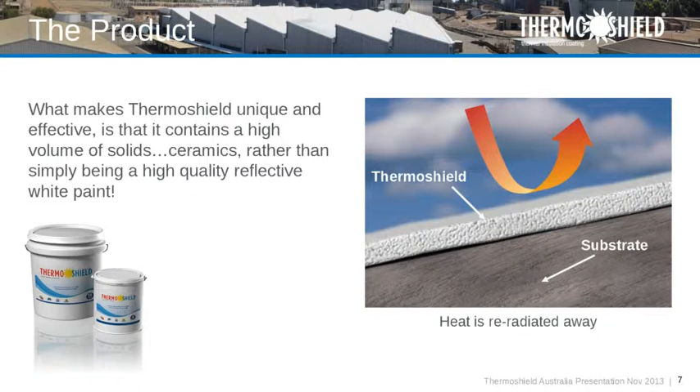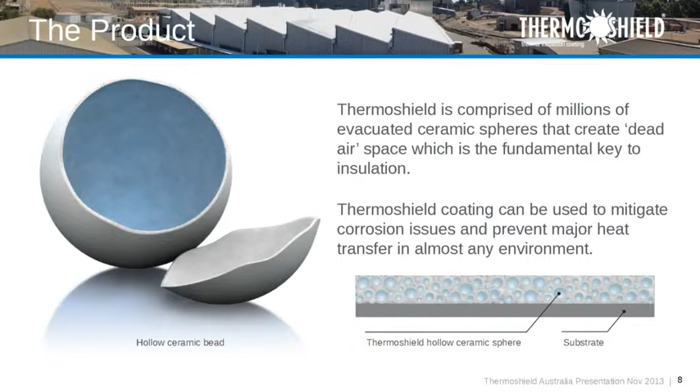I have some samples up here you can touch and feel later if you like. But that's an example of the spheres, and there's millions of spheres in this coating. And the special mixture is what you have to get right. And you have to put 2 coats on so that all the spheres cinch together. And it's actually fascinating because with this as the raw material, we get it at our factory, you put your hand through it, it's like a liquid. I mean, it's a very interesting physical process.

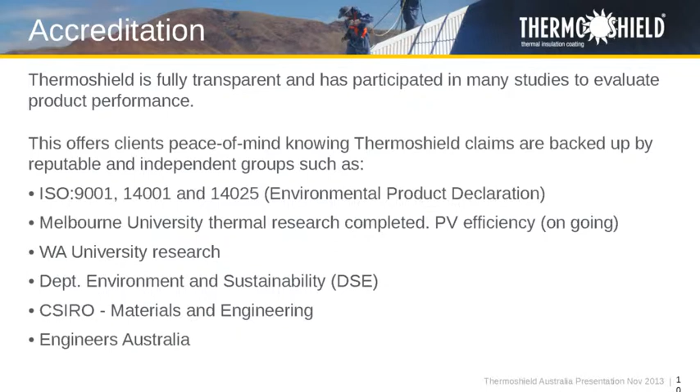It's changing on my screen. Oh, maybe I had a memory lapse. Just give it a moment.

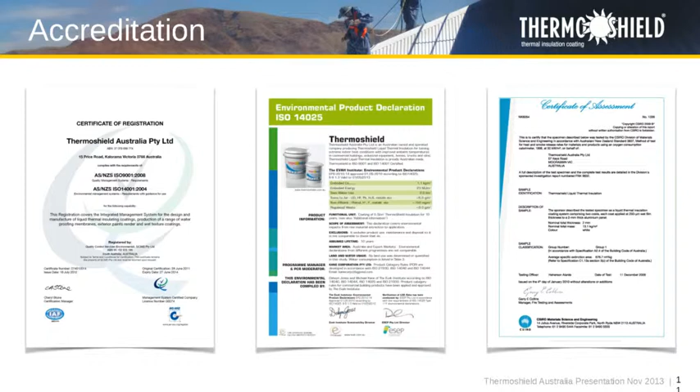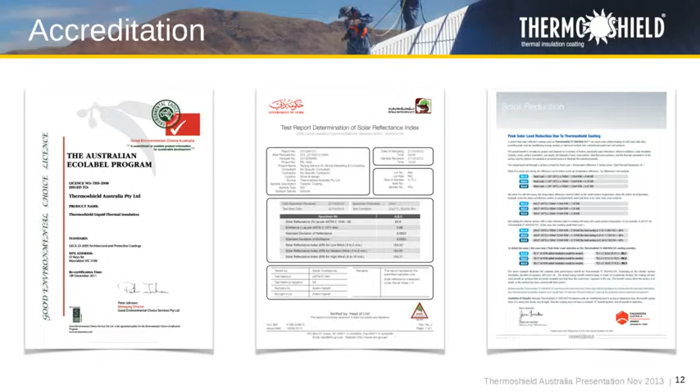Yeah, there are accreditations: ISO, EPD, CSIRO. We got GECA way back in the day when that was one of the only environmental certifications we could get, so we had that. We export to Malaysia, India, and Dubai, so we have our Dubai work. And this is what Engineers Australia came up with as far as our issues around emissivity, reflectivity, insulation values, all that. So if you want any of this in more detail, just let me know.

This is the latest excerpt from when I was at the Living Building Challenge launch with Dominique Hes last week at Abbotsford Collingwood. This was the result of the PV efficiency study, the thermal study. The red bit's the critical bit. As most people know, PV likes light, but as some people don't know, PV doesn't like heat. After 25 degrees Celsius, PV efficiency starts going down.

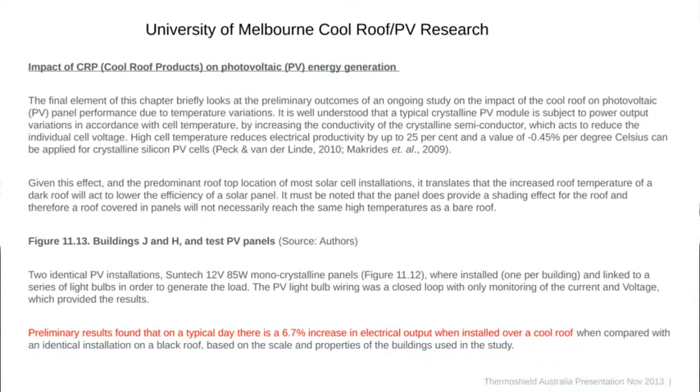So what you want to do is keep the substrate and the area around it cool. Also, because we usually come in a white color, even though we're not only white, we reflect more radiant energy around as well. So what you really want to do is keep your roof cool, your substrate organized, so you avoid thermal shock. Then you put PV on it, and that whole system, looking at the beast holistically, is a great way to deal with the thermal load on an asset—a building, a house, a chook shed, a refrigerated transport—and generate the maximum amount of PV energy you can.

The U.S. Coast Guard hasn't installed PV anywhere without a cool roof under it for 10 years. So they look at it as a whole system. It's not a decision, it's just the way they do it.

We have a number of proposals in to fix up some of their assets so that they can bolt the PV life expectancy of 30 years onto them, and hopefully the roofs will have that same life expectancy. But we're just looking into the concept that putting PV on old roofs is a little bit dysfunctional, because when you're going to have to repair the roof, what do you do?

So we try to be the good guys, as opposed to—as I was saying before—LEDs are really easy to measure. They're 83% more efficient than other downlights or whatever. You can measure that really easily.

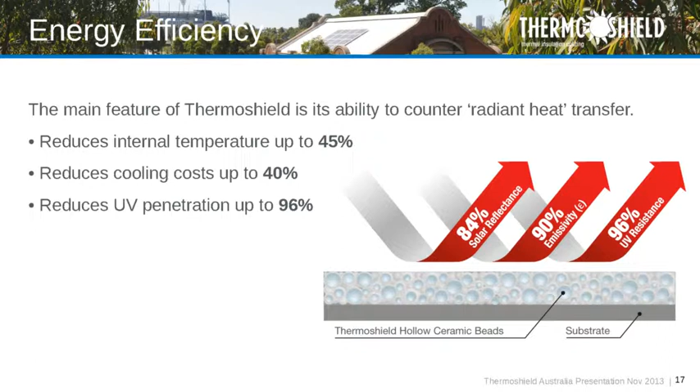Obviously, we're a little bit weather dependent, and that's just a fact. So we say these are the results that we get, but just like with your car mileage, your mileage may vary—it depends. We get a 3-year payback in Victoria oftentimes, and more like 2 years in Townsville, for instance. So anyway, we got the best results there.

This is just kind of a rundown of what you're trying to accomplish if you think about it holistically. I've been trying to deal with the Air Conditioning Association about re-specifying how buildings and the cooling is calculated by putting our stuff on an asset. So maybe you don't need a 40-ton condenser, you need a 25-ton condenser with our stuff. Or regardless, you're going to run it less, so the maintenance will be less.

We actually have a site up in Harcourt, a winery, that we coated. The gentleman got a grant to build a shed, but he couldn't afford the $100,000 to run 3-phase power to it. So he said, Charles, I can't pay to cool it, so I need you to coat all of it. We coated it 6 years ago now, and he's never needed air conditioning. We just stabilized it, and he stores his wine in it. Just crazy.

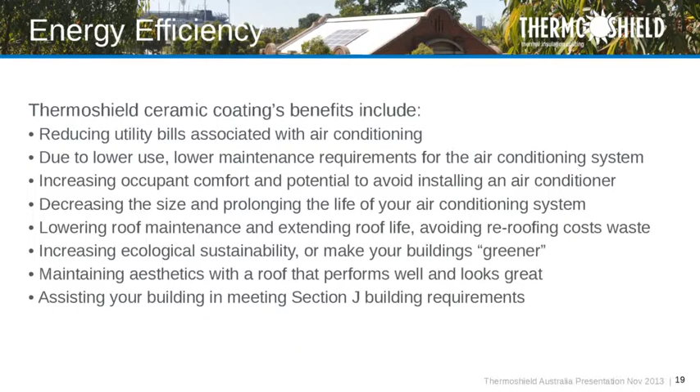Extending roof life, yep. We meet Section J requirements, and we think it looks good, and you'll see why. And this was the linchpin. It took a couple of years of research with the university, but reflectance is a lovely concept because there is a little bit of heat and visible light, and that's all good. But if you're working on only that principle, once the asset gets dirty, which everything does, you have no more tools in the toolbox. So what they found is that we have high insulation properties. So that's what gives us kind of the advantage around the place.

We do a lot of work for the Queensland Caravan Association members, and we get these lovely emails from the Grey Nomads in Alice Springs saying, Charles, my van's totally red, but if your stuff still works, we're sleeping cool at night, it's all good. So we get great results. And these are their findings in the report. And again, I have the whole report. If you're interested, I can email it to you.

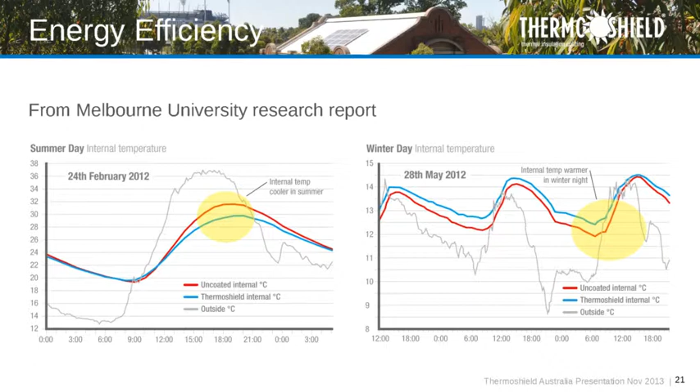But obviously cooler in the daytime, but warmer at night. So obviously in Victoria, we heat and cool. It's not Townsville. So some naysayers around the place say, oh yeah, cool roofs are all great, but they negate the benefits in the winter. Again, as I'll always honestly say to you, it's a tool in the toolbox. So depending what you use it for and where you use it, you just have to be aware of what you're trying to accomplish. But that was the proof that it's an insulator, and that's what, again, makes it more interesting.

Some of the data I'll show you, I hope I can get all my graphs and things happening. The other thing, for instance, I just did a presentation to Parsons Brinckerhoff. I deal with a lot of mechanical engineers because we do change the way buildings operate. A lot of air intakes off buildings are on the roof, so you're oftentimes taking in 80-degree air and then throwing energy at it to cool it. And then, ironically, you put it in a steel box with minimal insulation, transport it across the roof to shove it down the side of the building, and then you heat it up again. So the system doesn't seem to be that sensible if you think about it.

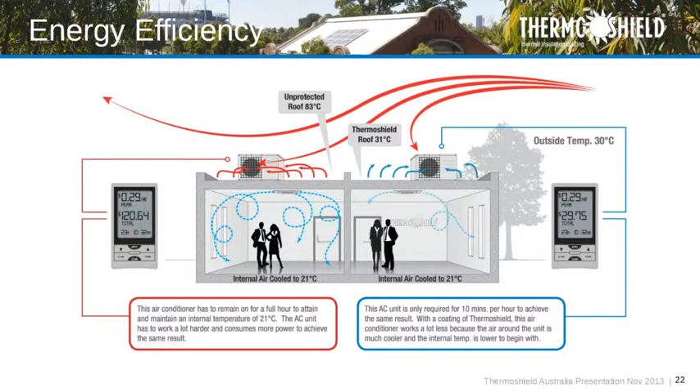So the results we get, which I'll show you, is we bring roof temperatures down, oftentimes 40, 50 degrees. So the air intakes, you have to throw less energy at it, less running time of the condensers, and obviously less thermal intrusion from the outside. So we kind of deal with it in a holistic, as I say, like a trifecta approach. And these are some of the roof temperature differences we get. And this is again from the University of Melbourne report.

We did the Croydon Leisure Centre some time ago, and that's the savings they got. We love leisure centers. They're great for public relations because everybody loves their leisure center, but they have two problems. They're energy pigs, and they have chlorine, moist, hot chlorine. So the Ashburton pool we just did last year, it was going to be a $20 million refurbishment project, redevelopment, and they were going to take the roof off.

We went in, we did the outside of the building for thermal reasons, and then we did the inside of the building for corrosion. The purlins, the supports, the inside, everything, and the whole redevelopment went to $14.5 million. And now they get the warranty, they get everything. But they didn't have to tear the whole building apart, and the downtime was reduced, and happiness all around the town. So leisure centers are, if you think about ammonium nitrate sheds, that's really toxic. Moist chlorine is the worst, it gets into everything.

We won a $45,000 government voucher from the Victorian government, and we're doing some regional work. And they wanted something rural, so I actually had a guy up there today in Bendigo. We're doing a chicken shed comparison. So the preliminary results, we're getting the energy data and all of that sort of thing. But just as a quick aside to show you how sometimes I get measured around things, and as I say, it's a tool in the toolbox. For chickens, I get measured less around energy and more about mortality. So less dead chickens, we win.

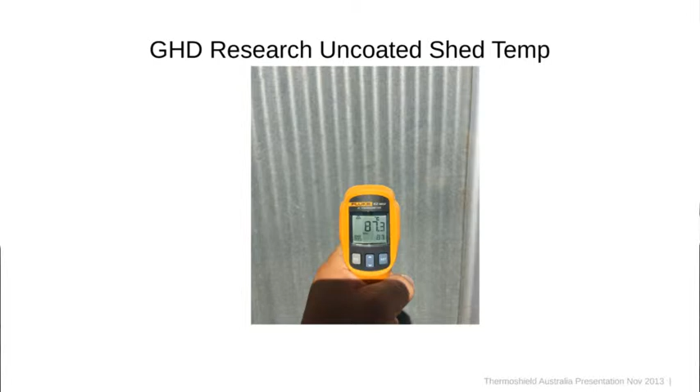At piggeries, I get rewarded for more pigs. Because when the pigs are more comfortable, the pigs make more pigs. So we are getting energy data, but with agriculture, it's always interesting because the asset owners have different motivations around things. So that's the chicken shed. We wanted to get an identical environment, if you will, so no shading and nothing to get involved in the study. When we started, that was the temperature of the shed exterior. And after we coated it, and we recently reformulated our emulsion, we got higher quality ceramics. That's the results we got. So if that heat is not building up on that substrate, it's not transferring in.

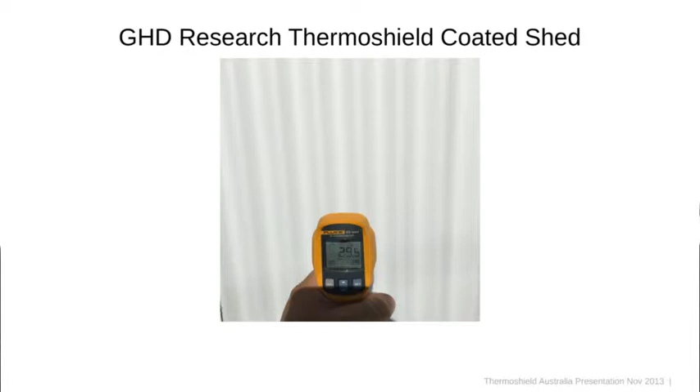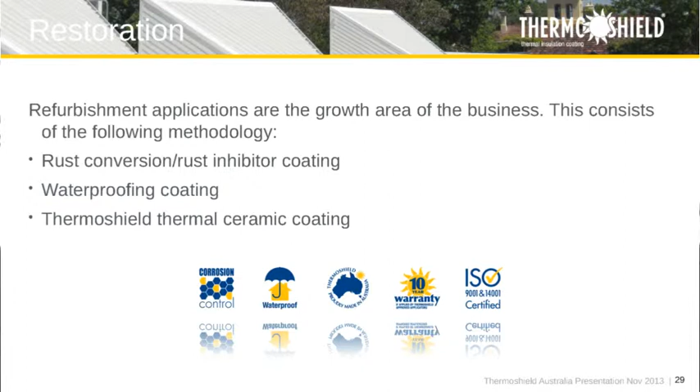And the beautiful thing is we have a 10-year warranty. But because we're an acrylic or a water-based solution as opposed to a polyurethane or a 2-pack, etc., in 10 years we can renew the warranty just by cleaning it and putting another coat on. We don't have to strip it back to the bare metal and start all over again. As I said, I have some samples up here you can touch. It builds up really well, so you just get more performance out of it.

So obviously, I'm trying to work with hospitals and schools. I actually have a meeting with the Alfred pretty soon, because unfortunately I had to spend some time there. I had my gallbladder out, and all their roofs are rusting tragically. You can imagine a hospital having to rip their roofs off to replace them. So I'm trying to work with them. I finally got in front of the head of capital and infrastructure to do our system with it: deal with the corrosion, the waterproofing, the thermal, and then hopefully with their building management system measure the whole experience.

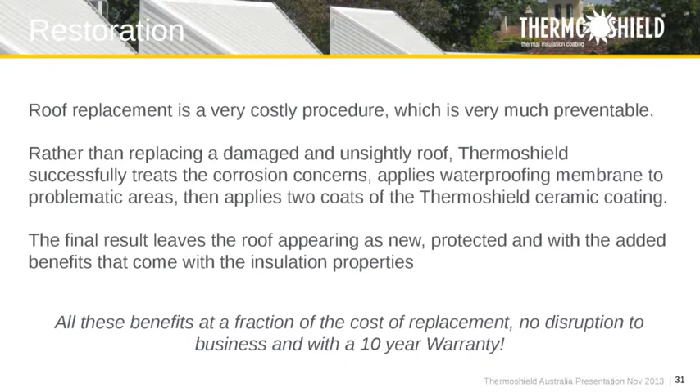Again, this is a roof plumber kind of dynamic and a building dynamic, but thermal shock is a serious issue. My wife bought us a puppy some time ago, and I thought the dog had some kind of seizure disorder, because every morning she'd be in the back extension where we have this big clip-lock extension, looking up and jittering and flipping out, and I'd say, "What's wrong with the stupid dog? What the hell's going on?" She could hear the roof moving before anybody else could. As the sun came up in the east, she would hear the expansion and contraction. I would hear it at 11 o'clock, and she'd hear it at 9 o'clock. I'm like, damn, she's smarter than I am. But that's how you get leaks.

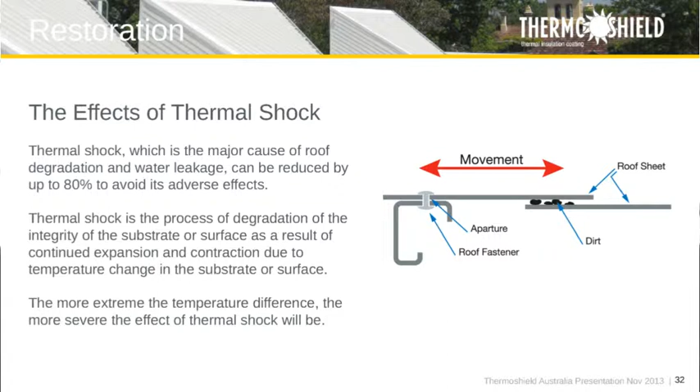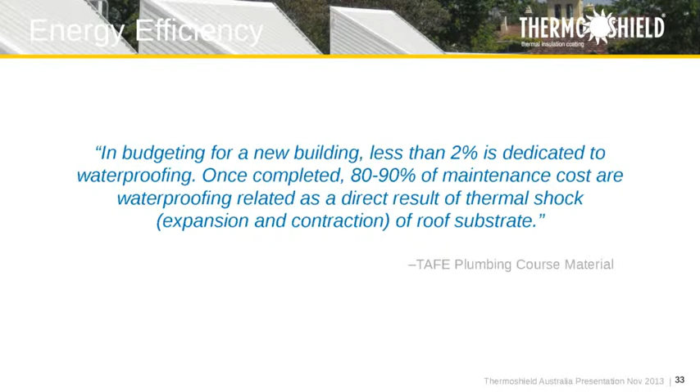The minute you put a roof on, it starts disassembling itself just by nature, especially in Victoria when you get your 5-degree mornings and your 30-degree afternoons. It's just physics. And because I've had to hire all these plumbers to do all the work prior to my Thermoshield extravaganza, this is just a fact. It's in the plumbing manual. So it's a little bit distressing, really. I guess that's good for us, but this is why I'm trying to deal with John Thwaites at the Australian Building Codes Board and the National Construction Code to put this kind of technology in as a tool in the toolbox: building envelope, dealing with assets, future-proofing, all that sort of stuff. Because it's just a shame that we let the outside in.

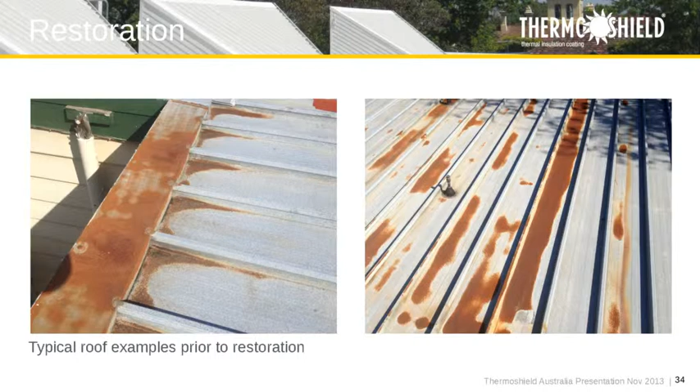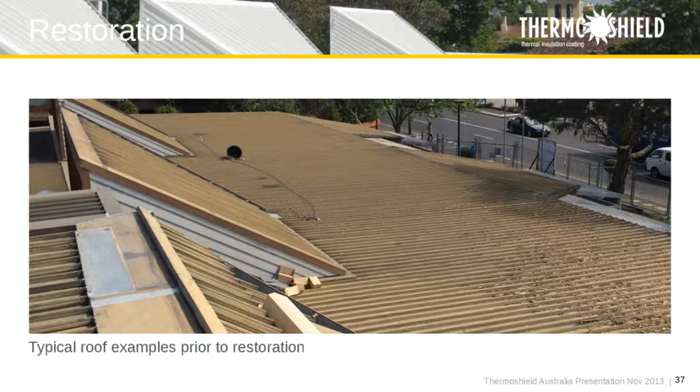Again, this is just stuff we couldn't put our Thermoshield on over naturally, so I'm actually in the process of buying a company in WA that has a compatible rust converter that actually works, unlike some Bunnings products, and is compatible with our system. So we see all this kind of stuff. That was the Ashburton Library before we got at it. Major energy consumer on High Street. They actually bent the roof over that top purlin, so all of that was cracked and leaking. And the red there is our rust converter. So it's also an Achilles heel kind of telltale. If our Thermoshield coating fails, you'll literally see red.

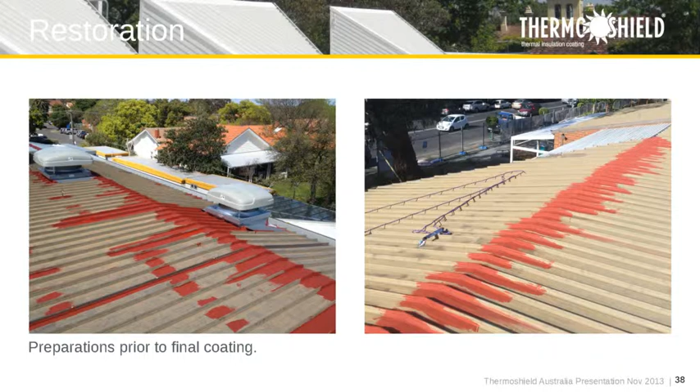So we own a drone. Everyone should have a drone. It's really useful in our business because we can do drone inspections and pre-project reports and analysis without actually getting up on stuff. So we repair everything and do it properly. Again, all that was just cracked and it was tragic.

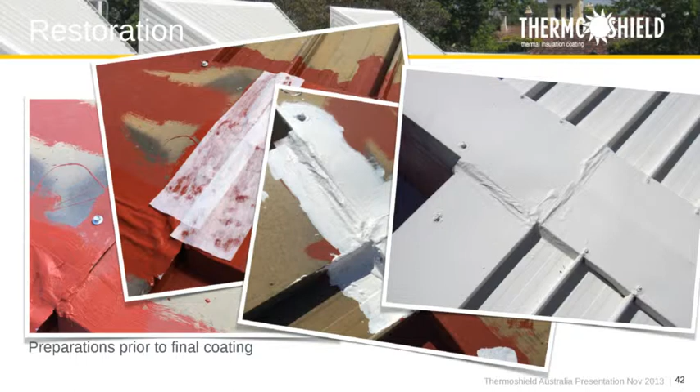And we come across these roof plumbers with dissimilar metals. Again, another sciencey thing around how corrosion starts. You need air, oxygen, and water, and then if you have dissimilar metals, it just accelerates. So we see this kind of nonsense all the time. So we put in fiberglass patching, so we really cinch up the asset, and it just takes care of business.

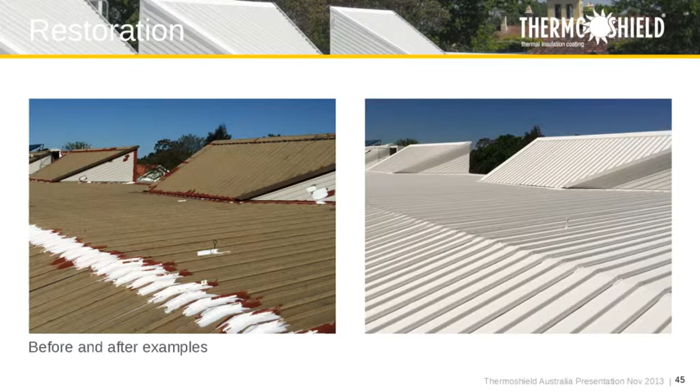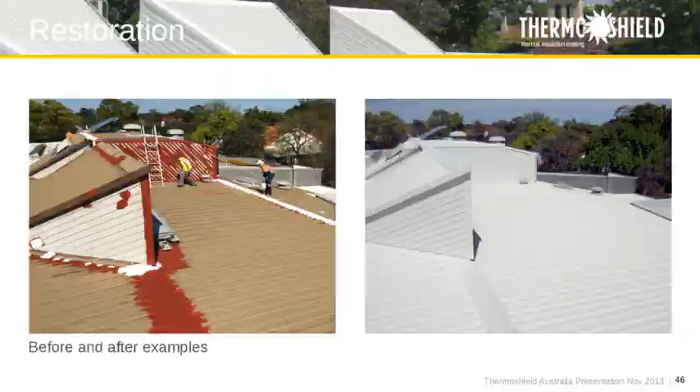And that's the before and after. We think it actually looks good. So many people are saying, oh goodness, they're going to have a white roof in Ashburton, oh gee whiz. Never heard anything about it. But the Dandenongs, ironically, have an adverse white roof policy for some reason. Now, bear with me. I won't go too much further into that because corrosion, I know you guys probably want to talk more about energy stuff.

And Rick, the engineer there, approached us and said, we need a solution. So he is a really good guy, and I love engaged clients because I want to be able to measure hopefully 12 months prior to our application, and then 12 months post, so we can see in different latitudes and longitudes and different kinds of buildings, because again, it's all different, what kind of results we can contribute to energy efficiency. So he has given us login privileges to his building management system. So we can capture data at any time.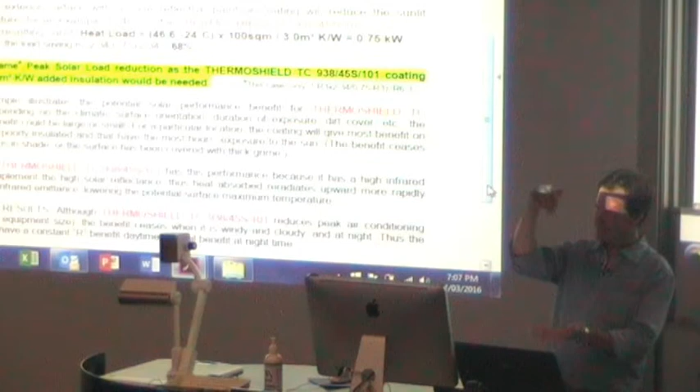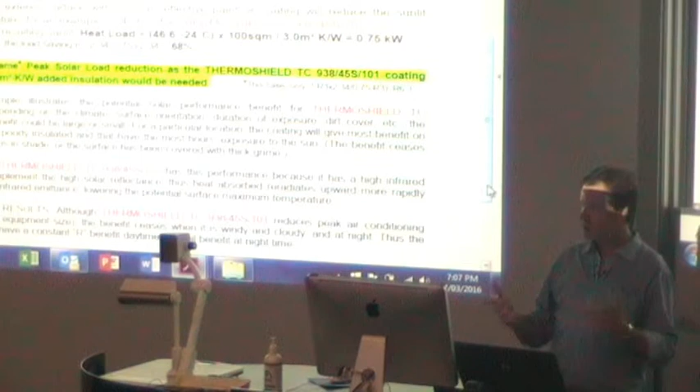the better it performs. But again, it's not working on the principle of R value like resistance. It's not letting the heat in the building first and then fighting it. It's fighting it from the outside. So we're fans of people that have insulation already in their structures, because we're just going to make it perform better. We're not trying to put the air conditioning guys out of business. As this report shows, extreme heat is going to be a thing. So air conditioning is still going to be required, but we're just saying, let's use it less and more efficiently.

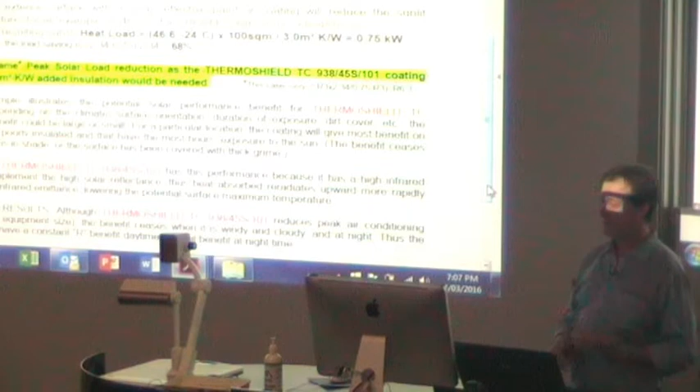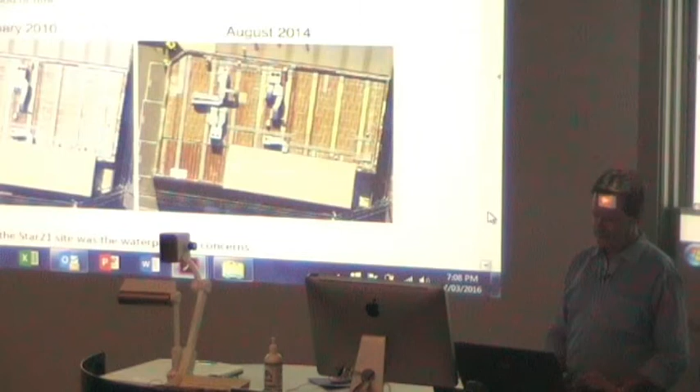This last one is a local example, so I want to show you this one. This is in Abbotsford, our Telstra dealer across from the Carlton United Brewery. We use Nearmap a lot, as you can imagine.

Nearmap is kind of like Google Earth but much more current, and you can time-lapse it. So as you see, building managers let things rust, and once you see the rust starting, it's amazing how it accelerates. When we started this project, all 4 of those condensers were going, and when we finished, only 1 was going. This client is also engaged and going to monitor his energy for us.

Plus they're going to have to replace that roof. Look at all the assets and the plant they'd have to disassemble to get at that roof to replace it. It would just be shocking, expensive, disruptive and tragic.

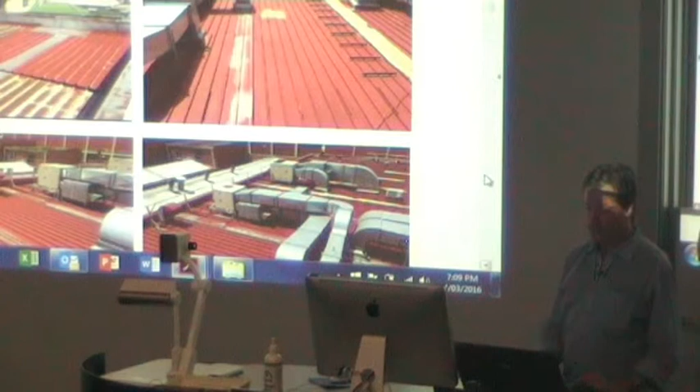Unfortunately for them, on this job our rust converter is actually an expensive thing because it really does work, and it's acrylic. So the most expensive part of this job was the refurbishment.

The red is, as I said, the rust converter. So again, if the Thermoshield ever failed and we did a drone inspection, if there was red coming through, we'd be able to see it. We do all the duct work too.

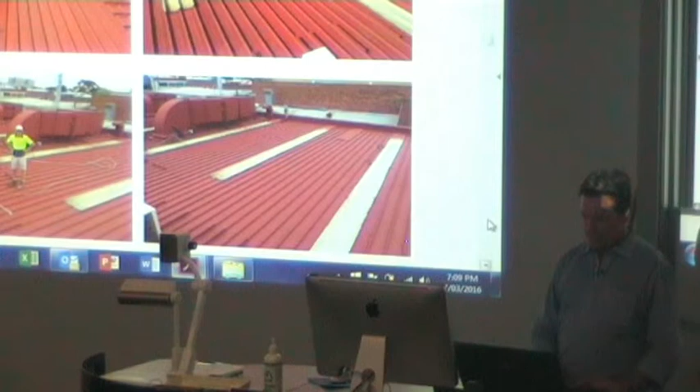The first coat, then condensers, second coat—this is the whole project in a nutshell, right across from the Carlton Brewery, right on Church Street. So that's before, that's the rust converter, and that's after.

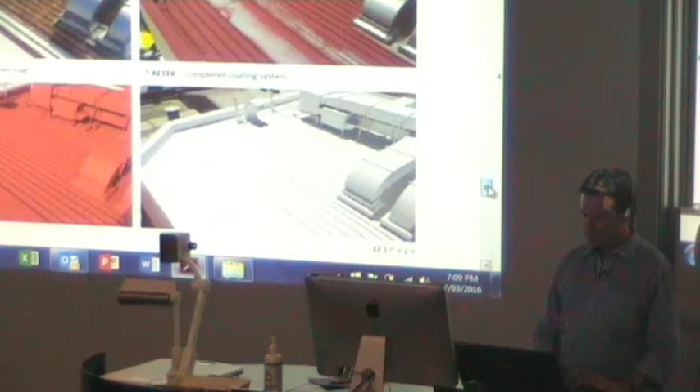It's just a really great system, so now you don't have to throw the roof out either. That's why we're adding that into our sustainability story. We're definitely all around energy efficiency, but we've taken it to the next logical level around expansion and contraction reduction, photovoltaic enhancement, and reducing the thermal load on the asset, whatever it is.

One thing I was going to try to show you—has anyone gone to that My Climate website, the thermal web from CSIRO? It's something the city launched. We're trying to wrap this in, because you can really see it.

This is an interesting tool they've developed where you can actually see the urban heat island effect. This is where that whole study came into play, where we were looking at roof potential, because there are multiple ways to deal with the roof—you can deal with it from a PV generation perspective, or from an infrared and ultraviolet rejection perspective.

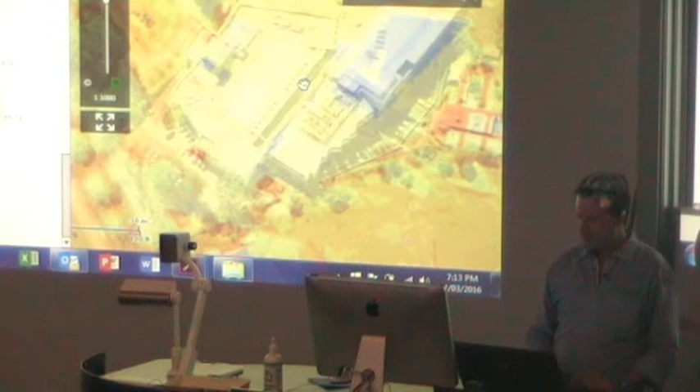This area here, we did all that about 6 years ago, and ironically it was done by an applicator who we fired, so we're redoing that for them at no charge. But then we're doing all of this and all around, hopefully before the season turns this year.

This is an interesting tool in the toolbox because you can see your neighborhood, you can see all sorts of things. But it's a validator. It's again, as I say, we're all about the data and the transparency. So this is another tool that we use to show people.

I was with an architect at the Pixel building a couple of weeks ago. He got onto this thing in his boardroom on the big screen, and he was playing with it, and he thought it was terrific. He was zooming in and finding this really, really hot spot. I didn't do it - he was zooming in, and it turned out what he was zooming in on was an oval.

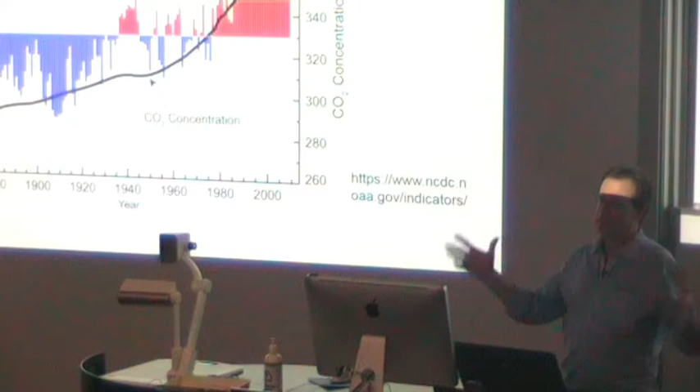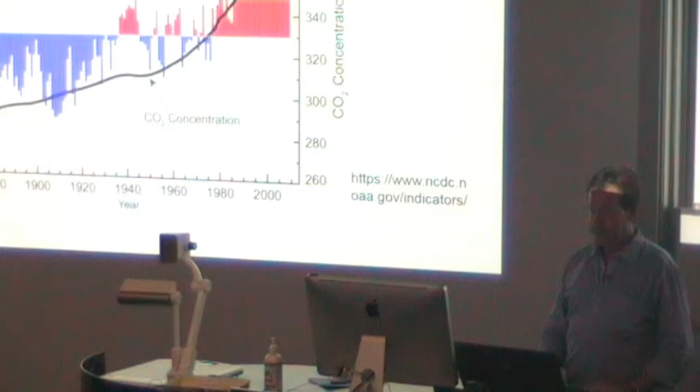They were very nice to email them to me today, just because I thought it was relevant, because I'm a big picture guy. I mean, yes, I love to do buildings and all that, but it's all about all of us, and schools and hospitals, and if this is the kind of stuff that's happening, we need a lot of tools in the toolbox, and I think we're just one of them.

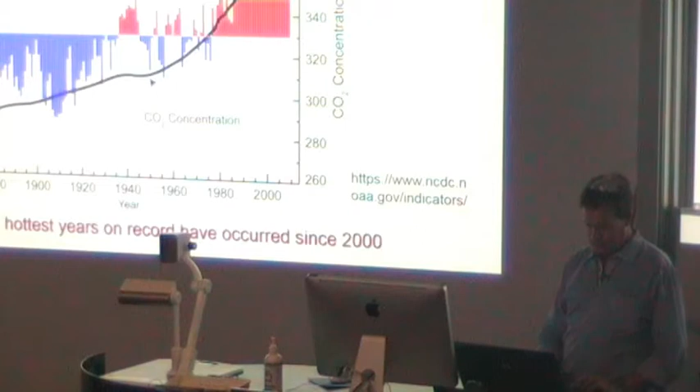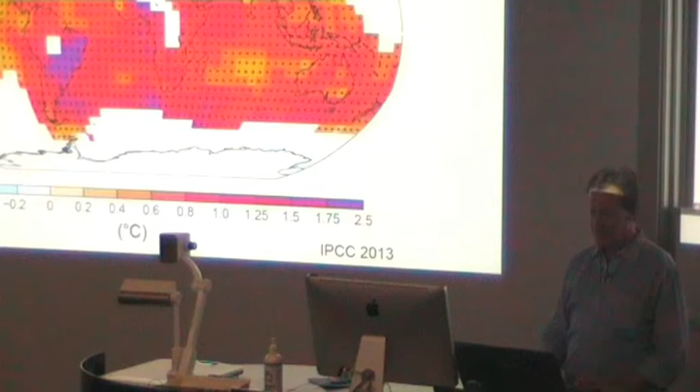And this was an interesting dynamic around a small change in the average and a large change in the extremes. So I'm not apologizing, but sorry for getting off my kind of horse, but this is the big picture, and this is one of the things I'm trying to help with.

So the Climate Council - this was just very timely because it was literally last Monday. And these are some of the other beautiful statistics which I really didn't want to hear. Triple the odds of heat waves. So we have to get on with it.

So this is why I'm trying to deal with the building code board, and right now the only people I can deal with are the innovators, the ones that think outside the box, who think the building code of Australia definitely needs an update, which it definitely does. And as I say, we're a tool in the toolbox, and hopefully there's more tools in the pipeline, and we're all going to go forward and prosper together.

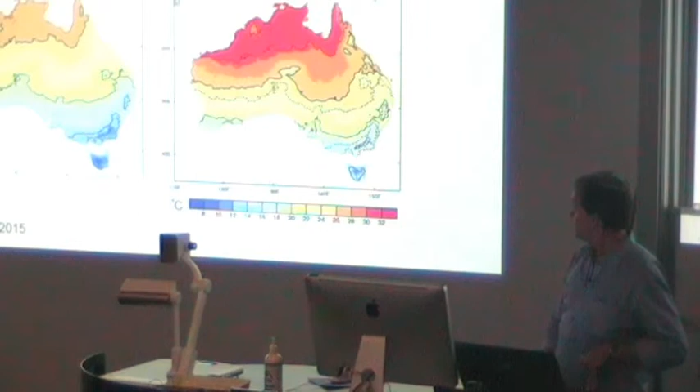But I have a 12-year-old daughter, and I'm a little scared.

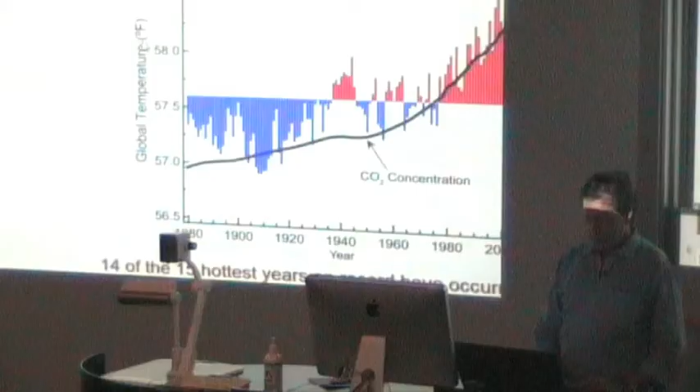So I think that might be all I have, unless anybody would like to see any particular case studies around schools or anything in particular. Wine - we do wine storage facilities, chocolate factories, heritage chocolates we've done, all sorts of things. So that's about the right time - any questions?

With a white roof, what's the reflectance like for people? It's a really obvious and good question. I think that's why the Dandenongs, the Shire up there, doesn't want them - probably just political reasons, they just don't want to deal with it. But I just did a house that had 6 kilowatts of solar on it in Lower Templestowe, on a hill with a house behind them. The gentleman, lovely guy, called his neighbor and said, 'This is what I'm doing, is it okay with you?' And he said yes, because I said, 'Rob, I can tint it if you want me to.'

Like at the Ashburton Pool, part of it you can see from one direction, part points another, so we did the majority of it in white and the rest in Surf Mist just to take it down a little. But we added our infrared pigments and get the same performance. So it's not only about white - it's just easier for us not having to tint, and as we discussed, tinting is an opinion. People say it's too dark, too light - we like white because we get the best performance simply out of it. But with Boroondara, they wanted the Kew Rec Center, some walls to be green on the facade, and that's fine. It's just more effort and a little more money because we have to work harder to do it.

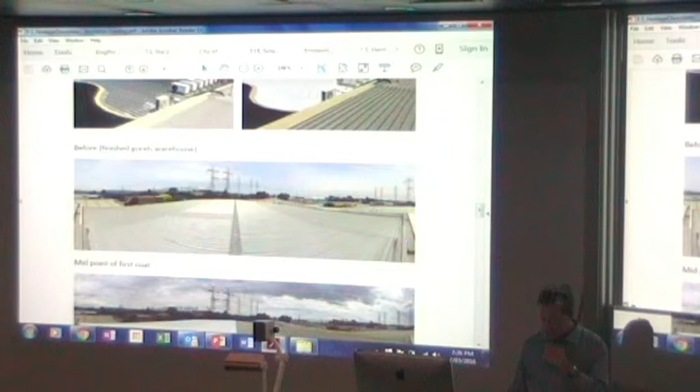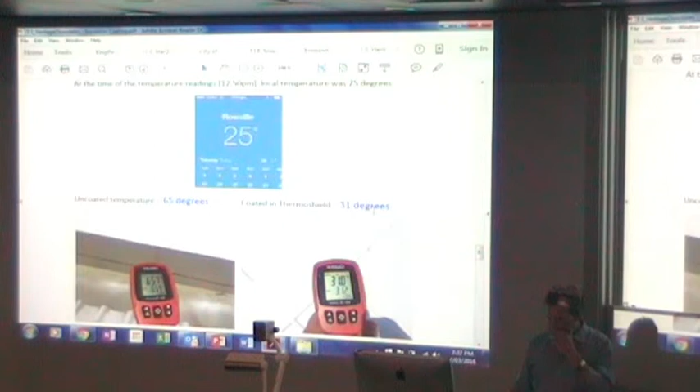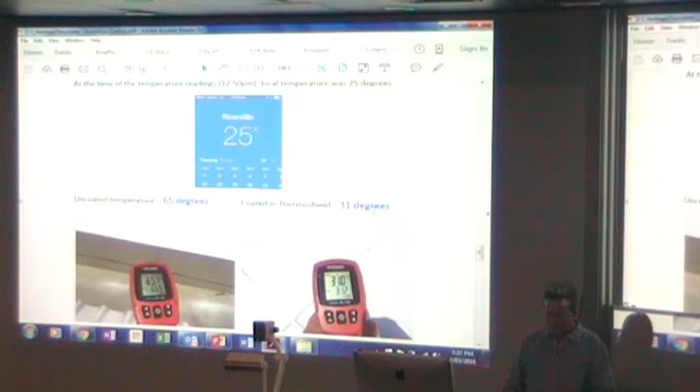I think we have - yeah, here it is. This was this project. So again, as I say, your mileage may vary. So 65, not 87 like in Bendigo, depending on what kind of day it was, but we got it down to 31 degrees. So that's a 52.8% surface reduction.

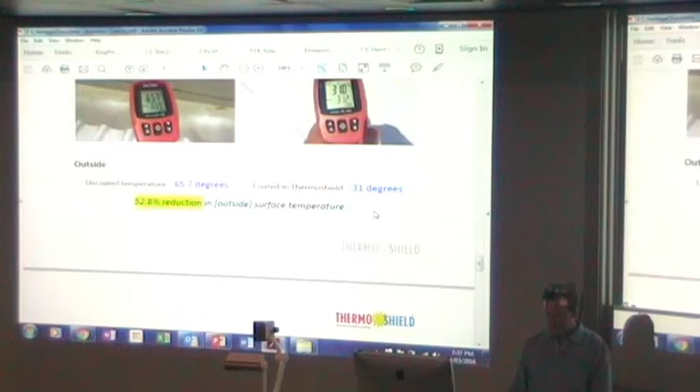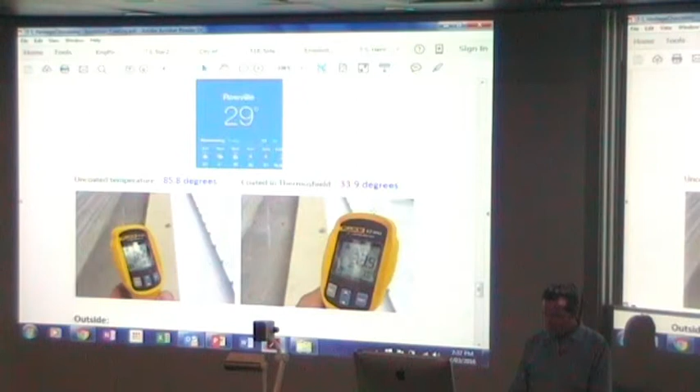So that's the chocolate factory. Oh, yeah, and this was a different day - see, 4 degrees higher. And the roof did get up to 85, then we got it down to 33, and that's a 60% reduction.

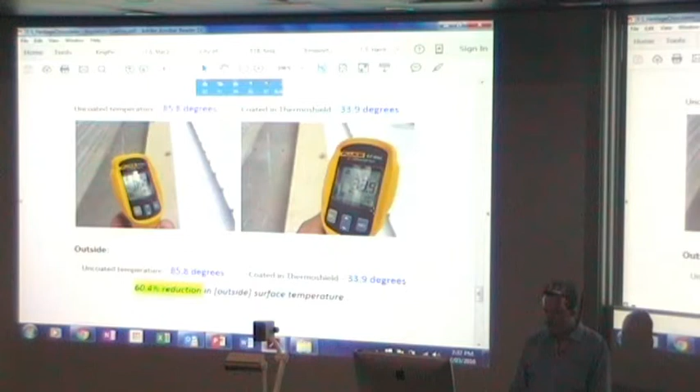So we love doing these kind of things. As I say, I love agriculture and food and all that sort of thing because obviously we just keep throwing energy at stabilizing all our food all over the place.

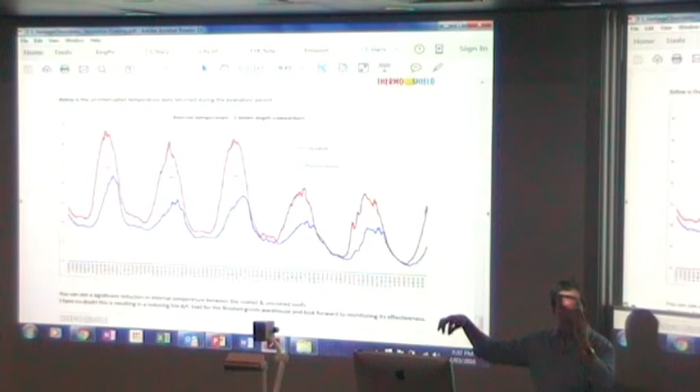And this is the internal temperature. We hung temperature sensors at different depths to get different readings - I think this one and Canterbury Wines. So we wanted to show, because obviously we have all different kinds of buildings, like the bowling alley where the roof is right here is one kind of opportunity, and when you have big sheds, it's a different opportunity. So we did that measurement for that one.

Yeah, so they're engaged and they're sending us our bills, and I think we still have temperature data loggers in there as well. Because as I say, Victoria's a different beast, and I'm always going to get asked about payback and all that sort of thing, which again I never guarantee anything because it's a bit variable. But if you get the principle of the thing and you have a heat issue, as I was discussing, well, you have a heat issue - you can feel you have a heat issue. You have energy bills, so we try to attack it.

I have a concern about the way you're measuring some of these changes, because you're saying a 38% decrease or a 60% or whatever percent decrease. What's the zero on your scale? Is it 0 Kelvin, 0 centigrade, or 0 Fahrenheit? Because they're all different temperatures. And what are you measuring zero from for your percentage changes?

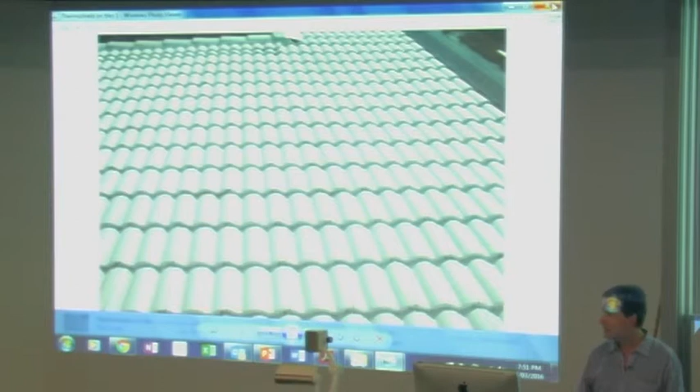You're all hired. So the answer, getting back to what does it apply to and what does it stick to - tiles, beautiful, no problem at all. It's just, you have to understand that if you're going to do work and rip up tiles to put in a whirlybird or whatever, we'll have to come back and seal it up again. So there's no reason we wouldn't do it. It's just - and we can do terracotta, that would be the next question - that's perfectly fine.

What else do we do here? Roughly, what are you looking at in terms of pricing?

We talk to a lot of people about the energy freedom bit of BZE, and you're talking to people who own perhaps a 1950s brick veneer with terracotta tiles, that sort of thing, and their question to me is how much?

Well, I mean, that's the thing. I presented to Steve Bygrave, and I've had Matt Wright at my house, and I bought a Sanden heat pump from him, and we all get each other, and it's all good. And Richard Keech, also, very smart guy, who I respect. I didn't think I'd be able to convince him, because I thought he knew everything - and I don't mean that in a bad way, he's a really bright guy. But he's been recommending me to clients just like what you're talking about.

The ones that are just insulation deficient, they just don't have anything. There might be low income, there might be a lot of things. And they're not going to be able to go up and tear open their roof to put in bulk insulation and do that kind of stuff. They're just not going to do it. So yes, we are that kind of solution where, again, we'd still like more insulation.

New builds, all good, a fan of all of it, but we just want to start dealing with it from the outside. And if I can get those kind of results by just jumping up on something and having it sprayed for $25 a square meter, and I've gotten it down to like 11 - I did 3 Woolworth stores in Tasmania, we were down there for 3 weeks and just banged them all out.